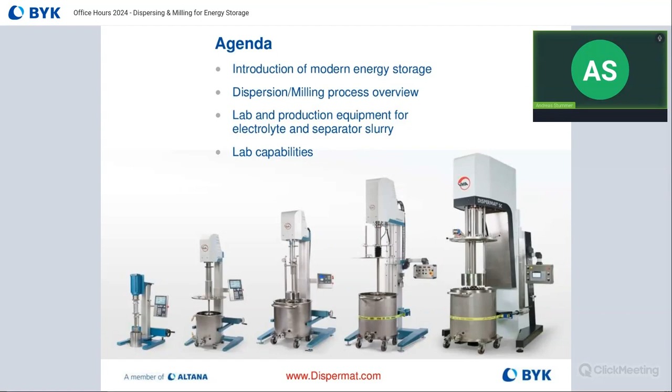So basically, everybody knows there's a lot of research being done with lithium-ion batteries, and this technology is always improving. The goal is to increase the range, have more power, shorter charging times, make them safer, and so on. A lot of companies today are looking at that type of equipment, not only from an R&D perspective, but also from a manufacturing and scale-up perspective. So picking the right dispersion milling technology, as well as the additive package, is really critical when we formulate these next generation slurries and battery designs for these energy storage systems or fuel cell applications.

So solid state lithium batteries are something that is being worked on aggressively as we speak. There are a lot of companies developing barrier coatings and so on that use our technology to improve the performance and help develop the next generation batteries. So here at BYK-Gardner, with VMA, who are the manufacturer of the equipment, we offer really a good portfolio of products that help you develop these types of batteries or fuel cells. The equipment is designed to give you best performance and offer modularity.

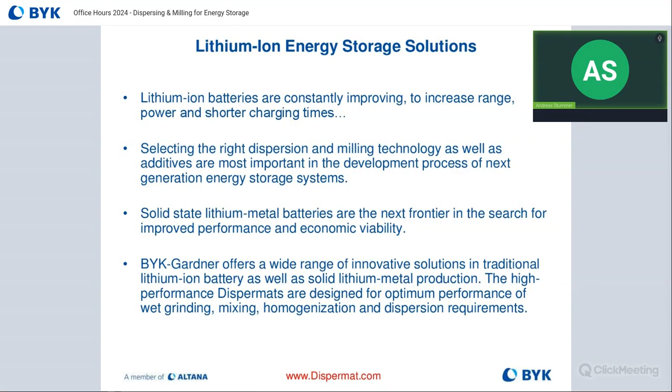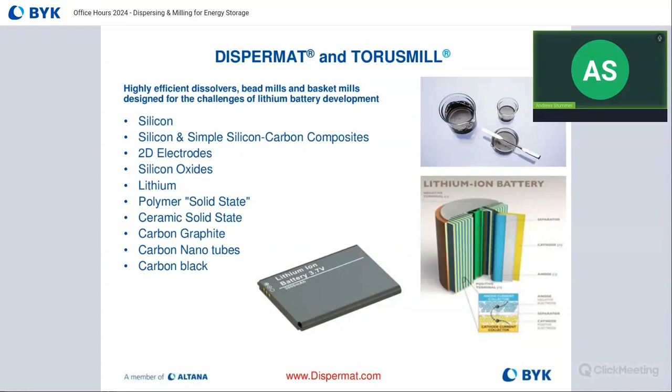So the equipment is used for many different applications. We have silicon dispersion requirements, electrodes, silicon oxides, lithium, polymers, solid state ceramic, solid state carbon graphite, carbon nanotubes, carbon black. So these are just some of those formulations that require really good dispersing technology.

So when you look at how these batteries are designed, there's basically an electrolyte in the battery that allows the ions to flow in between the anode and the cathode. They can be either liquid or solid. Soluble salts, acids, and bases can generally also act as these electrolytes. So dispersing and grinding equipment is used to improve and develop these separators by helping to reduce the particle size down to primary particle size. And that will help with the transfer efficiency of these ion particles moving in between the anode and the cathode.

Anode and cathode slurries are developed using a lot of our technology today, and that will help you get a better battery performance. Rheology and viscosity measurements are often critical during the R&D or even manufacturing process to understand what's happening with the slurry while we disperse or mill. We also have technology that can give you really good live data to help you understand how your slurry is changing during the dispersing and milling process.

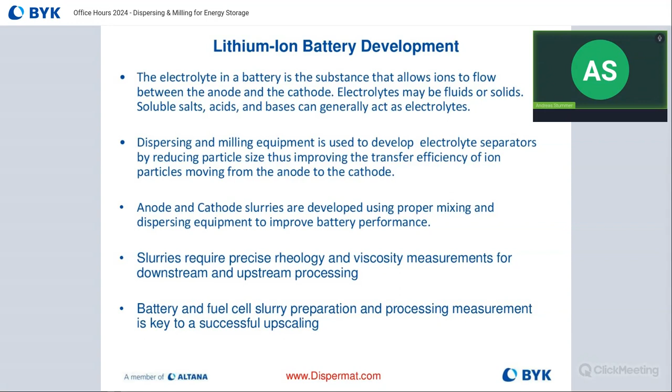Battery and fuel cell slurry preparation and processing measurement is also key to having a successful upscale result when we go from laboratory scale all the way up to pilot and then to manufacturing. We have a lot of that capability built into our control panel.

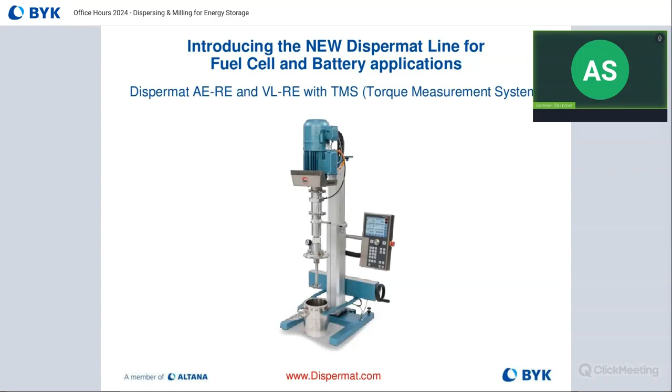Here you can see this is a brand new Dispermat developed for fuel cell and battery applications that already has a torque measurement sensor built in to give you really good live data on viscosity that you might need when you develop your slurries. We'll talk more in detail about the different Dispermats later in the presentation.

Here's a quick slide about that torque measurement sensor. That's an optional module you can acquire. It's not a calculated value when we measure the torque - we actually measure it. We don't use the frequency inverter to calculate it. We really have a sensor that plugs into our shaft, with a very tight accuracy of 0.1 Newton meters.

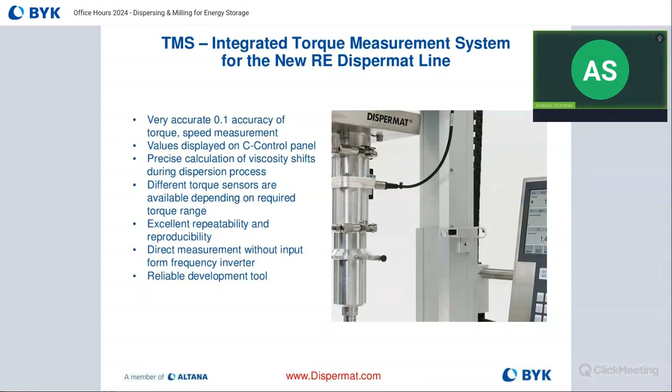All the data will be displayed on the actual control panel so you can see how your viscosity is shifting during the dispersion and milling process. Torque value is an indirect measurement of viscosity and can be very helpful in understanding how well you're processing your material. That's just one of the new developments we offer with the TMS sensor.

With that technology, the control board allows you to really precisely monitor and control all the different variables such as speed, energy input, torque value. You can actually see the tip speed. We have a timer function and a temperature measurement built in that gives you accurate data.

There's also the ability to see the entire dispersion process in a graphical interface. Each of these variables - speed, time, temperature, torque, energy input - will be displayed in a graph, with each of these indices as a trend line.

As you're dispersing and milling, let's say your viscosity is increasing - that means you will put in more energy. If you're running with constant speed, then you should see a spike or increase in the trend line of your torque curve, for example. That's really helpful to give you really good live data.

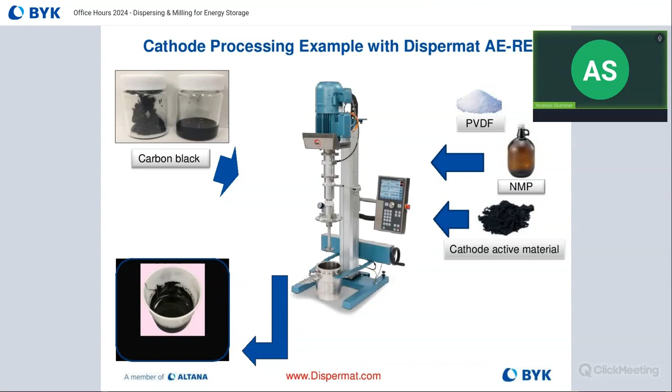Here's a good example of how we were able to do a good job with that AE unit to reduce the particle size of a cathode slurry. We used the Dispermat CN20, which is a standard middle-of-the-road Dispermat with a Cowles blade, for about 1 hour. We were de-agglomerating these larger particles, and the starting point was about 100 microns.

Then we were using the TML mill, which is a basket mill attachment that pops onto the disperser head, and basically converts the CN20 disperser into a CN20 media mill, which is very unique to our approach to dispersing and milling. You only need one piece of equipment that can do both dispersing as well as milling.

The final result after 3 hours is really good - we were able to reduce the particle size all the way down to 2 microns on average. We're able to go much lower; we have a nano kit, but this is what the customer wanted to see, and that was their reference point. They stopped the exercise at 2 microns and were very happy with these results.

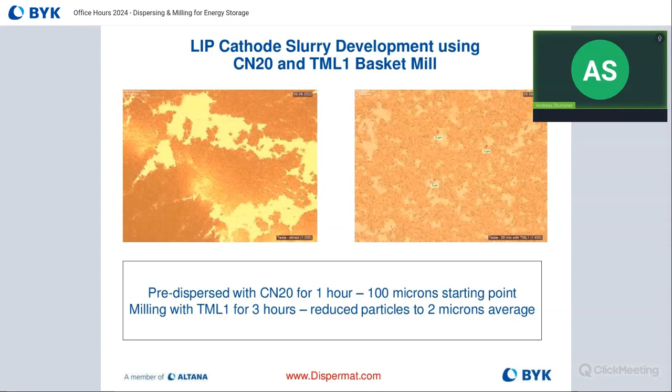So leading into now the dispersion process, what are we actually doing when we use this type of equipment? As you look under the microscope, a lot of times you have these clusters of particles. They are clumped together by invisible forces called van der Waals forces, basically electromagnetic forces that bind these particles together. Our goal is really only to break up these binding forces.

These larger clusters are called agglomerates. By using a Cowles blade, a disperser with the blade with teeth, we're able to turn them down into the aggregate size - smaller clusters with less particles, but still clumped together. If you want to go from the aggregate level down to the primary particle level, then you need to do milling.

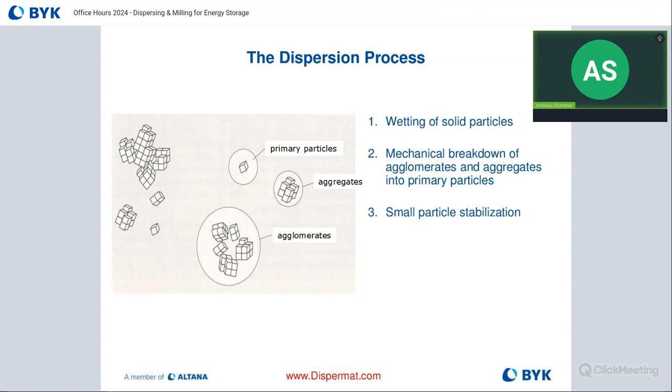And then, of course, we always need to remember that we need additives to help us stabilize our materials in the suspension so they don't flocculate back together.

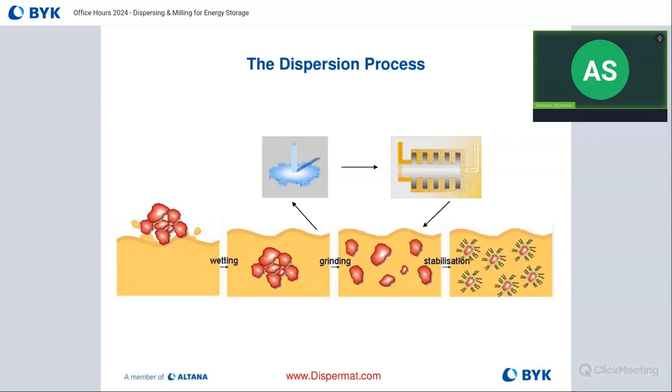And then again, really critical is the stabilization of our particles in the slurry, where we need to use some formula to help us do that.

I apologize, I'm not the additive expert, but I can put you in touch with my colleague, Erin Kelly from BYK Additives. She's really knowledgeable and is our end-use manager for the additive side to help guide you in the right direction.

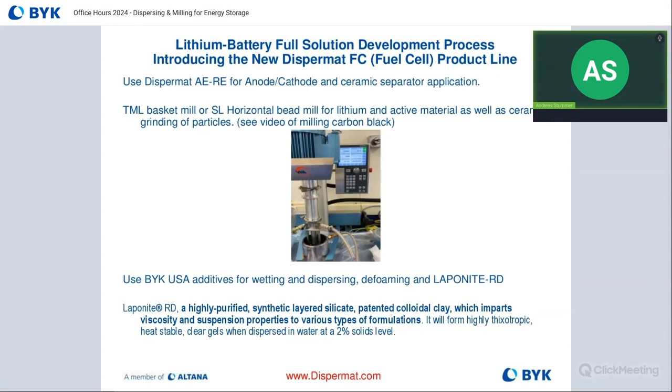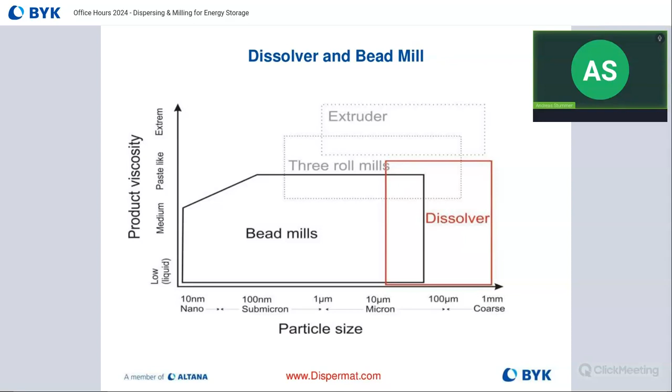So we can use different bead mills. We have a basket mill approach, what you've seen in the pictures earlier, works really well, or horizontal bead mills for super small particle size requirements. Anything less than 500 nanometers, we need to use a horizontal media mill, and with that we can really go down to sub 100 nanometers. We have customers that are milling in the 50 nanometer range with that type of equipment.

So for pre-dispersion, it's really critical to remember when we use a Cowles blade, we want to stay within 18 to 25 meters per second of tip speed. That's kind of optimum, and that really yields good results. For that, we have a range of different dispermats we can talk about a few slides later. I'll show you some of these models.

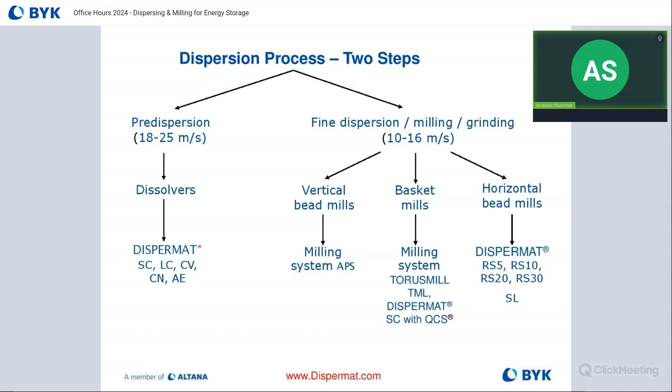And then we also need to remember, when we are milling, some people refer to it as fine dispersing or grinding, our tip speed is between 10 to 16 meters per second, so a lot slower than the pre-dispersion process. There again, we have vertical bead mills - our system is called the APS. We also have the basket mill TML, and then horizontal bead mill RS for manufacturing, or the SL for lab and pilot scale.

Depending on the viscosity, we need to increase or decrease our blade diameter. If my viscosity is really low, I want to use a smaller diameter blade. If my viscosity increases, gets really thick, more like a paste, I want to increase the diameter of my blade to help move the product. Imagine a very thick slurry, almost paste-like. If you use a small blade, it would be difficult to process the material because the blade would be sitting in the middle of the container, kind of spinning and not doing much, while the product settles out around the smaller blade. So it's really important to use the correct blade diameter for your viscosities.

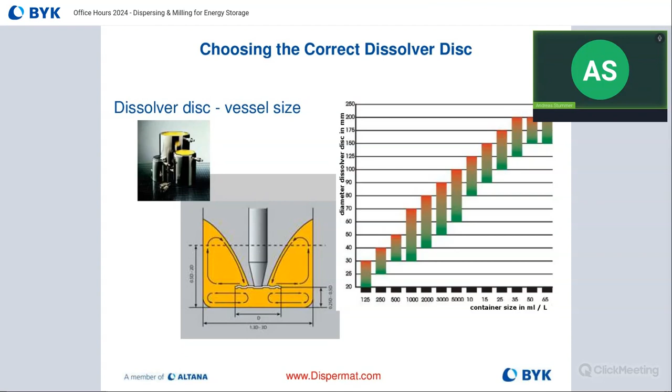There is a rule of thumb for selecting the right blade size. When we talk about viscosities, materials from 0 to 500 we consider low viscosity. Medium viscosities are from 500 to 5,000, and high viscosities are anything over 5,000 centipoise. This just helps you select the right diameter blade.

This is a really important slide. As I mentioned earlier, the tip speed is so important to dial in correctly. There is a formula: basically it's the RPMs multiplied by pi times the diameter of your dispersing blade. If you want to express that in meters per second, you divide everything by 60. But you also have to remember that the diameter of the dispersing blade needs to be expressed in meters.

So if you have a 50 millimeter blade, for example, you need to express it as 0.05, times 3.14, times the RPMs. Let's say you're running 5,000 RPMs, and then you divide everything by 60. That will give you the actual tip speed at 5,000 RPM with a 50 millimeter diameter blade. The goal is to be between 18 to 25 meters per second to optimize the pre-dispersion window, and when we're milling, 10 to 16 meters per second, but the calculation is the same.

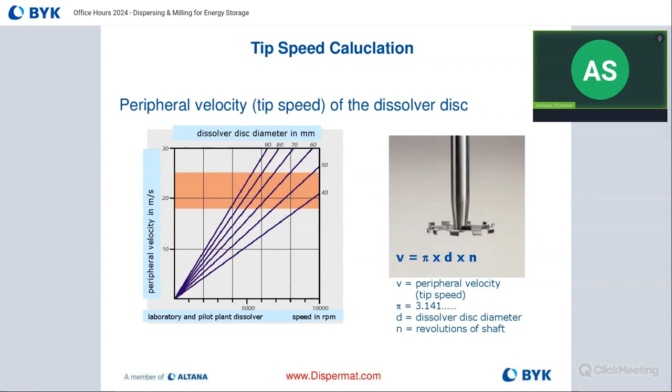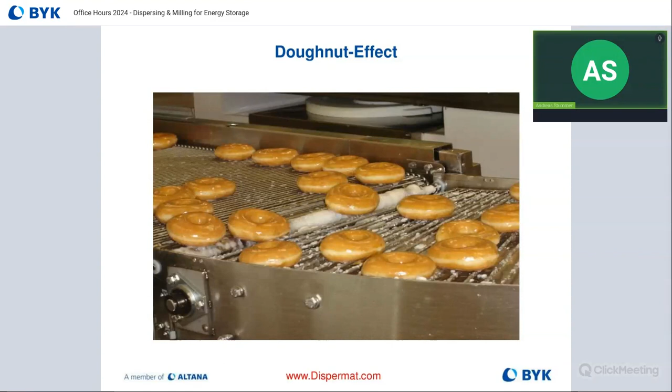That's really important, and we have something called the donut effect. It's called that way because it's really something you can see when you look inside a container and you're optimizing the dispersion parameters. Here we have the optimum tip speed, the right blade selection, a good viscosity, so we see a donut forming. That is basically the visual cue that, yes, I'm deagglomerating. This looks good—you should see good results after about 10 to 15 minutes. So that's what you want to see.

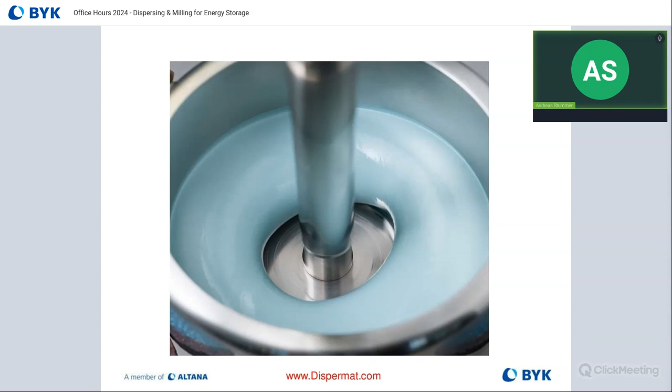Of course, there will be instances when you have really low viscosity materials where it's very hard to see a donut because the donut would collapse before it can even be formed. That doesn't mean you're not dispersing properly, it just means you have very low viscosity. So you can play around with maybe a different blade diameter. But usually the donut is visible between 2 to 5,000 centipoise—you'll have no problem seeing a really good looking donut.

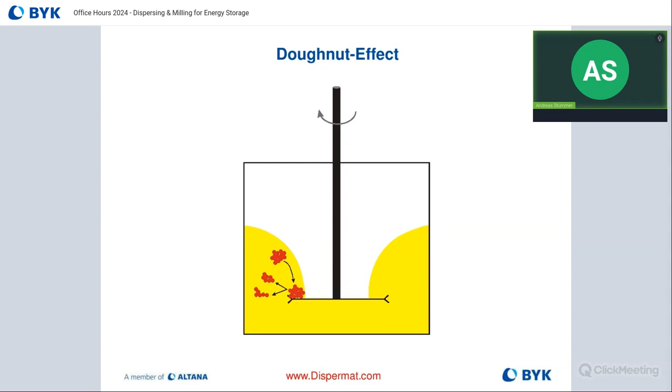Here is how the donut effect is established. You can see the blade has these teeth, and these teeth and the edges of our blade are actually causing the shearing, and this is where we are deagglomerating. That's basically where the donut should build up, right there on the edges—as you had seen on the slide earlier, that's how we actually form a donut.

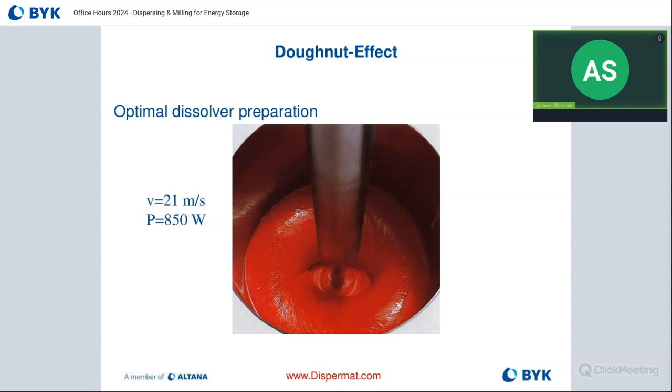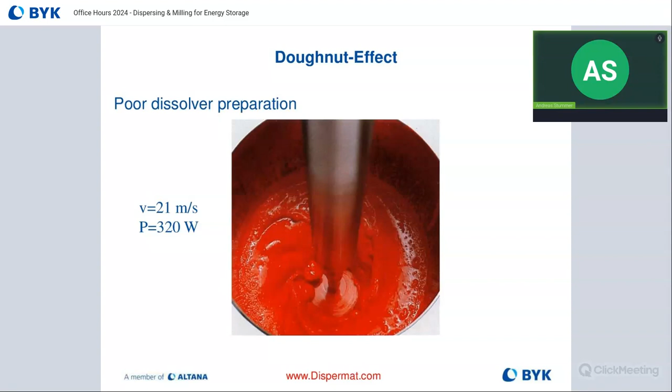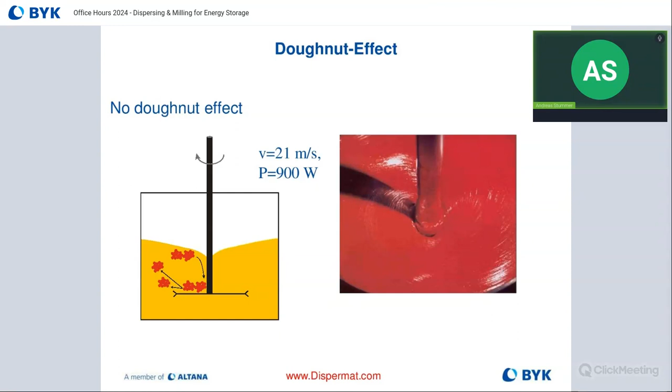In this case, we're running with 900 watts of energy input, also at 21 meters per second. It's not a problem, we are putting in a lot of good energy. We don't see a donut because the material is really thick, so it has a very hard time to actually form a donut. That doesn't mean we are not pre-dispersing, it just means our viscosity is probably quite a bit higher than 5,000 centipoise. Therefore you're not really seeing the donut, but you are still deagglomerating. I would not be worried about it.

It's very important to remember that timing is everything. The duration of our dispersion, when we pre-disperse, can be as low as 15 minutes or as long as an hour, depending on the material. The donut effect is a good visual cue to help us understand how well we are performing.

Tip speed, again, 18 to 25 meters per second is optimum. The geometric consideration, meaning the blade diameter, there's different blade types as well. Some blades also have additional teeth, or can be different types of materials. That will also depend on the viscosity - larger blades for high viscosities, smaller blades for very low viscosities.

The volume of our mill base in the container - we are looking at about 50% fill rate, as high as 70% and as low as 40%. But 50 is kind of the sweet spot. We don't want to go too much higher because if you put in a shear, you're going to spill the material. Also, when milling with a basket mill, if you have a 70% fill rate, it's likely if you turn up the mill that, because the basket mill weighs a lot, it kind of pushes the product up, and then you could also have spilling if you go above 70% fill rate. So we like to stay in the 50% range.

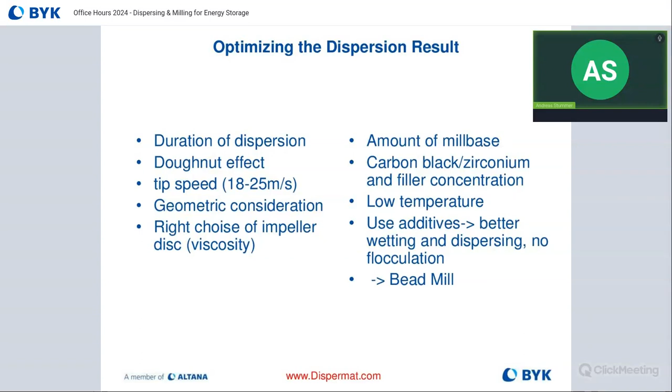And then again, additives, very important. Don't forget the good additive package to really help us not only process the material, but also stabilize it post-processing. And then once we are done with the pre-dispersion, we move over to the bead milling process.

Bead milling is a whole different animal. It allows us to really start to take the aggregates and bring them down to the primary particle size. A dissolver is great, we need it, it's an absolute must to start the process to de-agglomerate, but we can only put in a limited amount of energy, and it's really only used to de-agglomerate. We cannot get from the aggregate level down to the primary particle size with just the dissolver blade.

But it is critical that you always start with the dissolver for wetting and for breaking up these large particles, because if you don't, you run the risk of clogging a mill - the particles are so large that if you use a screen in your media mill, or a dynamic gap, they would clog very quickly. So it's really important that you always start out with the dissolver.

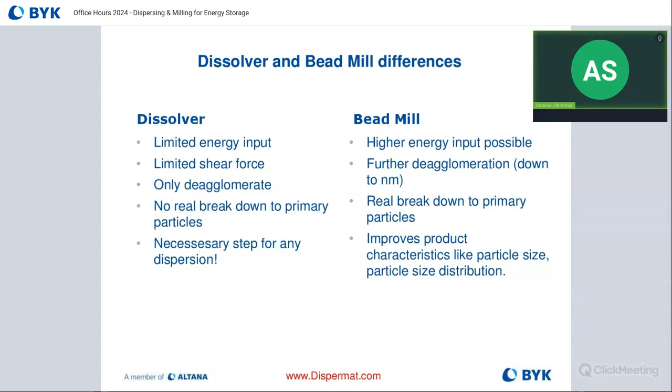Once we achieve good results and we are between 10 to 30 microns of particle size, that's when we start the bead milling process, where we can put in a lot more energy. This really helps us get down to the primary particle size, and even nanometer range for a lot of these applications. It gives us a much better looking product, much better performance, reduced particle size, and a much better particle size distribution.

So what actually happens inside of a bead mill? Basically we have an enclosed chamber - it's open on top, not totally enclosed, but where the beads are. Then basically we have the slurry go in, either in a horizontal setup or a basket mill setup, and inside of that mill we have beads with our milling disc or rotor.

As these beads collide at very high velocities, they're actually pushing away these particles, these clusters. That shearing motion, that action, is actually what's causing the binding forces to break up and reduce the particle size. That's really what is happening inside of a mill, and that's how we actually get down to the primary particle size.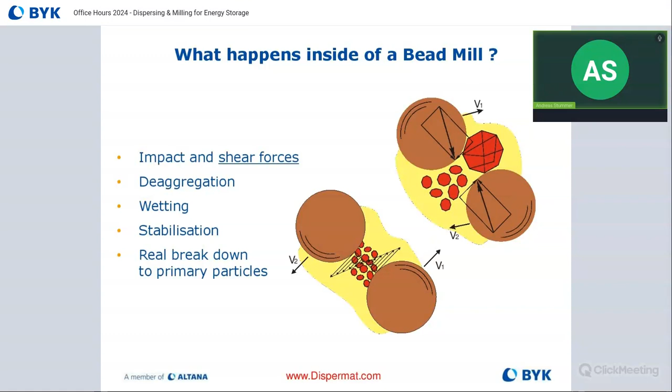So kinetic energy is very important to remember. There's a lot of people that talk about different types of beads. We have customers, most of them use zirconium oxide. They are very good beads. They're heavy, and they will have much higher kinetic energy than, for example, something like glass or light beads. So kinetic energy is very important, and beads play a really important factor in that.

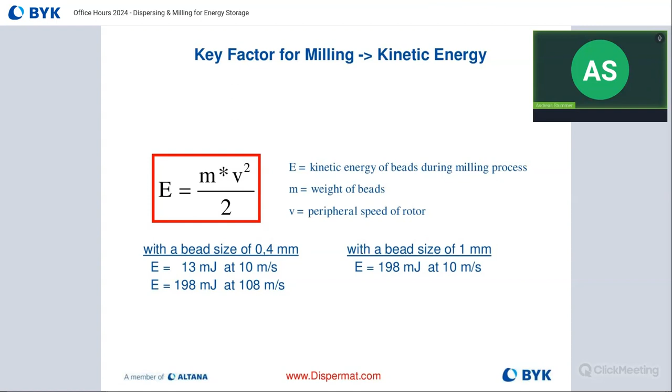As you can see, M is the weight of the bead. So if you want to write down the formula, that helps you understand how much energy you're putting in during the milling process. This kind of slide shows it well.

The difference, for example, you have a zirconium oxide cerium stabilized bead. The specific gravity is 6.1 versus a glass unleaded bead which is 2.5. So it's almost 2.5 times heavier on the weight per bead. Also much harder, it's almost 3 times as hard to use a zirconium oxide bead than a glass bead. So yes, they're more expensive, but they are really the right media to use when you're milling these types of slurries. There are all different sizes available depending on the final particle size that you're looking for.

We usually start out with our mills at about 1 to 1.2 millimeter beads, that's kind of where we start with a 0.5 millimeter mesh. There's also a dynamic gap in the horizontal mills, standard 0.3 millimeter, that allows us to use the 1 to 1.2 millimeter beads.

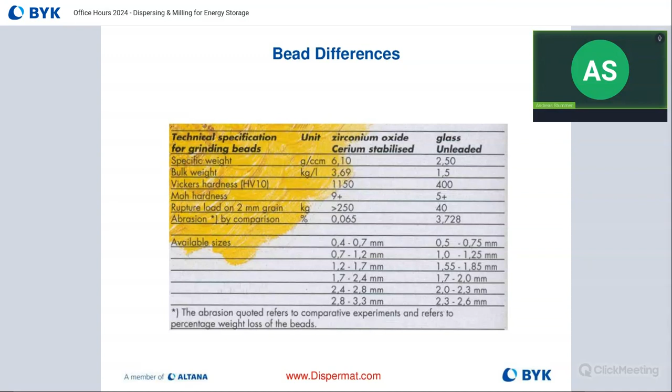Okay, so this is a good slide, I like it because it shows you again. You have these larger beads, and right where these beads merge or collide together, that would be your particle cluster, and that would be pushed out. That's the shearing that happens in these corners as the beads collide, where the breakup of the van der Waals forces actually takes place, continuing to reduce the particle size during the milling process.

So it's not so much that we're always crushing the particles. Think about it this way: when you were a little kid and you sat in the bathtub and your mom gave you a rubber duck, and you tried to grab the rubber duck in the water by pushing your hands together, what happened? The rubber duck, you probably didn't get it, right, in the water. The rubber duck was always pushed away by the force from the water. That's kind of like what's happening inside of a bead mill. So the beads would be acting like your hands, and the particles would be the rubber duck. As the beads come together at high velocities, that rubber duck, or that particle cluster, would be pushed away.

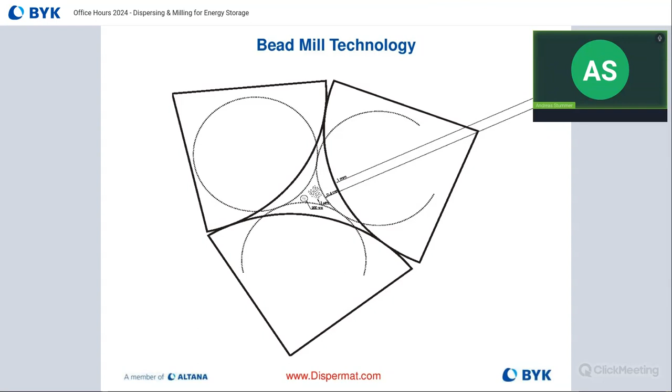Of course, you can also crush some of these particles, but the idea is to break up the binding forces, and you're really achieving that through those shearing motions, and that's what happens inside of a bead mill.

So here are some of the critical parameters that are going to influence our process. Particle size after pre-dispersion with the dissolver, we talked about that earlier, 10 to 30 microns is kind of the sweet spot. Bead size depends on how small you want to go, what the final particle size is, but we like to start out with about 1 to 1.2 millimeter.

Specific weight of the beads is really important to bump up the kinetic energy. The bead loading is kind of fixed depending on the type of mill you're using. Shape of the beads is very important, you always want really good quality beads. If you look at them under the microscope, they should be perfectly spherical, not oval shaped or with edges or shards. We have seen all sorts of poor quality media at low cost from low cost suppliers that do not hold up to good standards. So make sure you spend a little bit more money on better quality beads, that will be very helpful in the process. Please stay away from glass or anything like that, as glass will break easily, and then you end up with shards in your mill base, and that is not good.

Speed of the milling tool when we're milling, again, 10 to 16 meters per second. I know I'm repeating myself, but it's really, really important to maintain a good tip speed. Product temperature, again, control is key. We have cooling jackets on our supply vessels as well as on the milling chambers. How often does it go through the milling chamber or basket mill, and the total amount of milling time, how long does my product sit inside of the milling chamber.

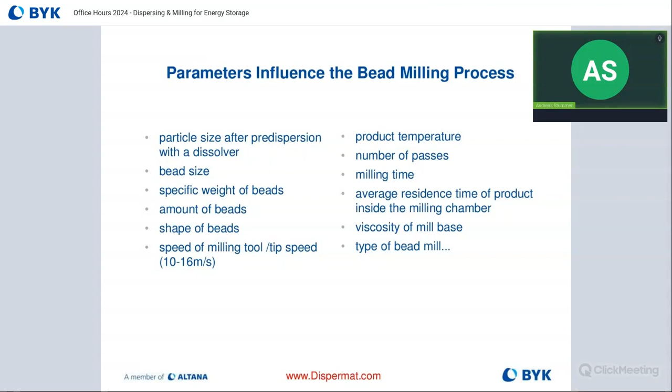My test is always: I have a container with your product, I turn it upside down. What happens to the product? Does it come out, is it flowing out? If it's flowing, even as thick as honey, as long as it flows, I can process it. If it's stuck in the container, it's very difficult to process. That will severely limit the type of milling system you can use for that formula.

Now let's talk more in depth about the different types of dispersion units we offer. One of the key things I mentioned earlier is our modularity approach. You have a standard dispermat, the piece in the middle, a dissolver, and then you can accessorize it depending on how you want to work with the equipment. It gets delivered with a blade, but then you can buy a rotor stator, a vertical bead mill, a wall scraping unit, a vacuum system called CDS, and the TML basket mill, all components or attachments you can buy later to put onto our dispermat.

The way this works: as you can see in this picture, right below the motor on top, there's a clamping ring. There's what's called a DL shaft, and it functions almost like a bayonet style system. You remove the clamping ring, turn this assembly 180 degrees, and it pops out, so you can just pull it down. Then you replace it with any of these attachments, put it in, lock it back in place, put on the clamping ring, and now you're running a basket mill, for example. That's really cool because you don't need to buy multiple pieces of equipment, everything can be processed on one machine, you just buy the different attachments.

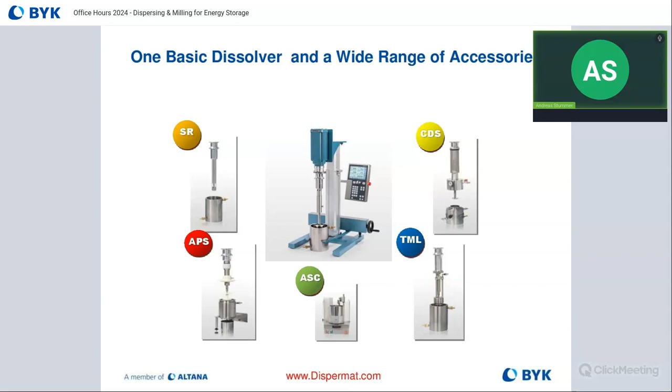The vacuum system is nice because it allows you to not only pull a vacuum, but also purge with nitrogen, argon, or any other inert gas if that's critical for your process. I can also acquire a basket mill with vacuum capability, so not only can I disperse under vacuum, I can also mill under vacuum, or mill with nitrogen, argon, or any other inert gas. That's really cool, and unique to the VMA dispermat line.

Here's a better picture, I should have shown it earlier. You can see the clamping ring right below the motor. That's what you remove, then you turn this assembly 180 degrees, pull it out, and replace it with whatever attachment you want to use. This one comes with the torque measurement system, has the ability to add vacuum, and we also have the ability to have variable speed.

We can also run the machine not only at a certain speed, but also with constant power. That means instead of running, say, 3,000 RPM, I want to run this trial or manufacturing process at 3,000 watts of energy. As my viscosity changes during the dispersion or milling process, my speed adjusts. If my viscosity increases, my speed decreases to maintain the 3,000 watts of energy. If my viscosity decreases, my speed increases to maintain the 3,000 watts. That is called constant power.

So I can either go with constant power or constant speed, depending on how I want to run it. Or if I want to go from small lab scale to manufacturing, I might want to use constant power because it gives me really good quality upscale data. Not only is it easy to process the material, but it will also help calculate how much energy you would be using to process a certain amount of material in a certain amount of time when using constant power, because I know exactly how much energy I'm using. Again, the modularity approach with the various accessories.

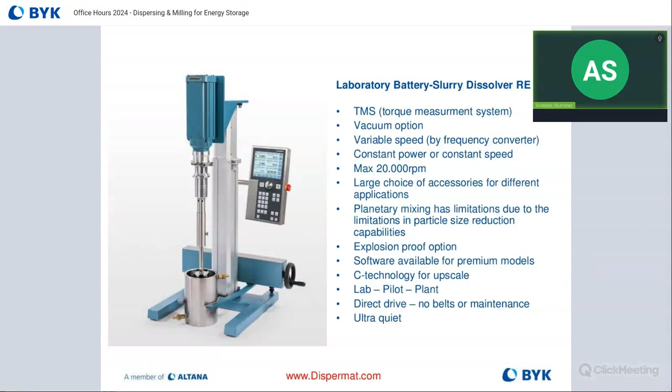Our motors, if you ever worked on a Dispermat, you would recognize it immediately because they're so quiet. They are basically beltless, direct drive motors, so there's no maintenance on the motor at all. The shaft plugs in right to the motor below. There's a flange that goes directly into the motor, so there's no belts or anything like that, no oils needed, no grease. So these machines will last a lifetime. We have customers that are using Dispermats that are 40 years old that are still running on the original motors today without ever having to do any maintenance on them. They're workhorses, so they're extremely reliable and high quality build.

Then we have a very cool unit. It's for dispersing slurries under a vacuum. This is the vacuum dissolver, purpose built, so this is not a modular attachment, it's really built that way. And it also comes with the wall scraper.

A lot of customers really like that option to remove the slurry from off the container wall and push it back into the middle. That's what that little arm does. You can see that in the back there behind the blade, that would be the dispersing or the scraper blade.

So the cover is open on top. I mean, it's closed, but you have the ability to open it with a viewing glass. There is a light, so you can see what's going on inside of the container while you're pulling a vacuum. But again, vacuum is not a necessity. You can also just purge it with nitrogen or argon gas or any inert gas that you would like, and then you can process your material that way.

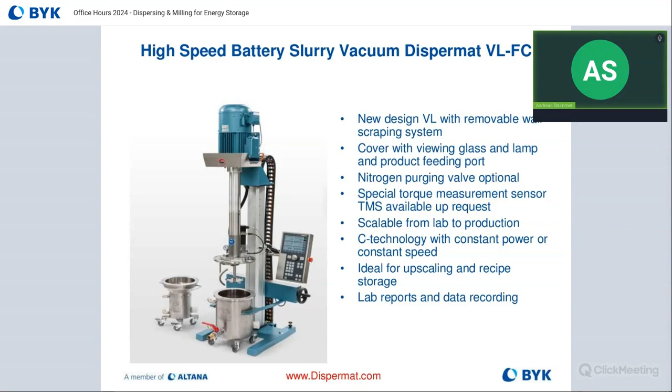Cooling jacket, so this is double walled and has all the pressure gauges on top. And then we have the ability to supply with one base model, different size containers, so you don't have to swap out the cover. As you can see, there's a container behind on wheels that's smaller than the one that's locked in place. That container, though, has a collar on it, and that collar perfectly fits the cover of the VL. So that means it's fully exchangeable to different container sizes depending on how much slurry you want to process. Very cool, very good to go from small scale to manufacturing, because we also offer vacuum dissolvers for manufacturing also.

So this is the latest dissolver, very small lab scale. It's called the Dispermat CV3 Evo, and it's going to be released here in May. We had it down in Florida at the battery show, and we're going to have it up in Detroit, Michigan. I think it moved from Novi to Detroit, the large battery show. So we'll have one of those up there as well.

This can go up to 20,000 RPM. We have the ability to do full attachments on here: dissolver blade, TML basket mill, APS vertical bead mill, vacuum system, or even a rotor stator would all fit onto this machine. Beautiful design. And there's going to be two models, a basic model and the premium model.

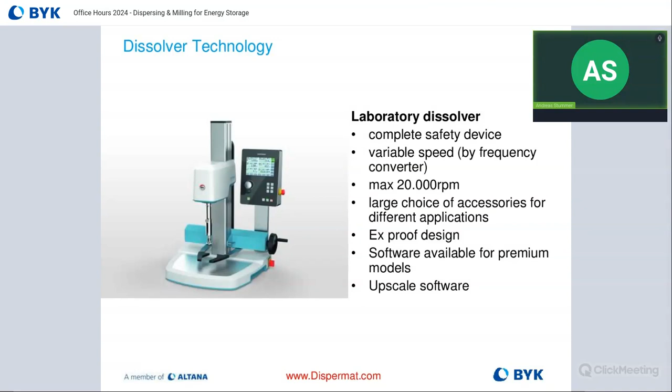The premium model also has the ability to plug in a scale on the control panel right next to it, so you can weigh out your raw materials right next to the dissolver, and it'll show the data on the screen right here. Then you can store all the data for different batches, so you can give a batch a name or a product ID, and that way next time if you want to download all the data, you have all the data right there, as well as all the raw materials that you weighed out on your lab report. So very cool.

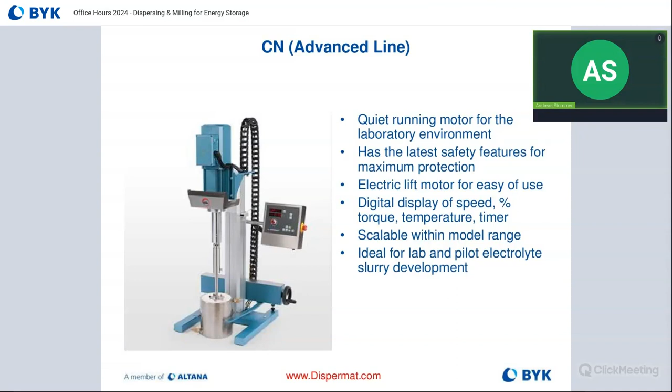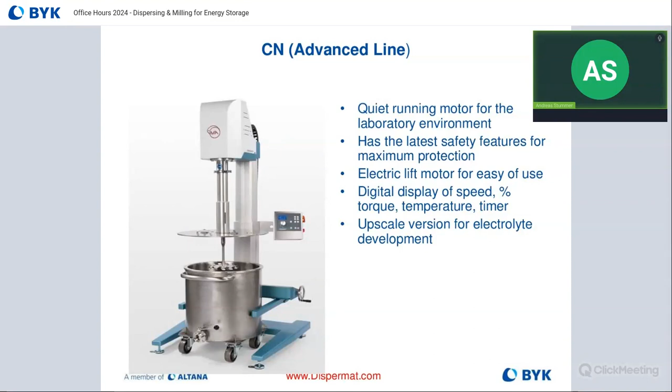Then we have the CN. This was the model I showed you earlier, where we processed the cathode. It's a basic machine that has the ability to put on all these different attachments. And then we can go pilot scale in the same model range, the CN range, again very simple, high quality build, giving you excellent performance for larger volumes.

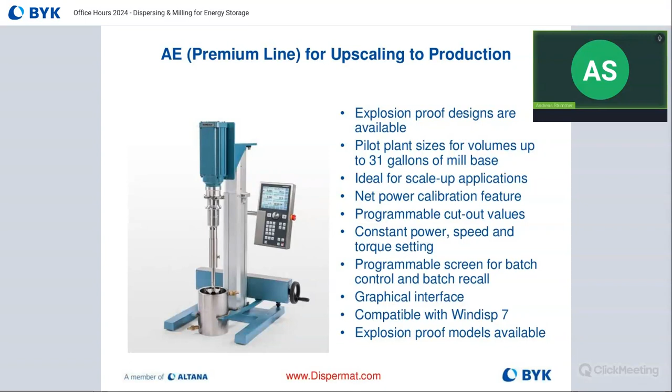Then we have the AE, which is our premium line, also with the AE RE for batteries. This is fully expandable again, but it has that C control panel. And again, this is also scalable, where we can go up to an AE pilot unit for larger volumes. Again, this can all be configured for vacuum, argon, or nitrogen.

And then basically you're also able to mill with this machine, not only disperse, but you can add a basket mill on here, as you can add on the smaller models.

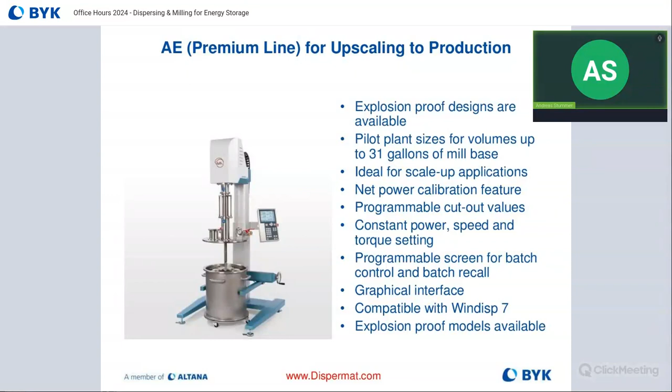Then we have a range of horizontal media mills that are used to go into the super, super small nano range, so anything less than 500 nanometers, as low as 50 nanometers. We can do that with the SL machine.

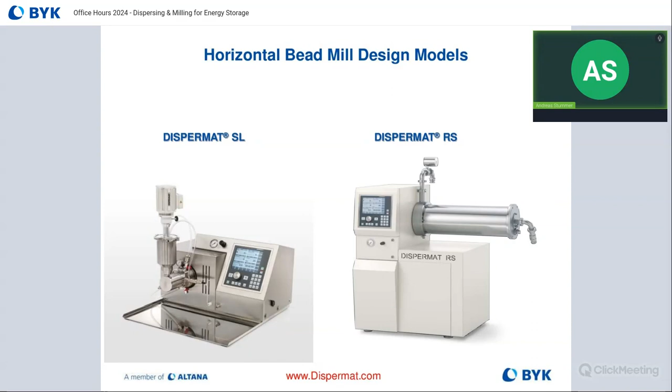So on the left, you have the lab model, and then the production scale. One example of a production scale would be the RS on the right. In our lab in Connecticut, in Wallingford, we actually have an SL up there with the nano kit. So if you ever want to come up there and take a look or run your slurries, you're more than welcome to join us.

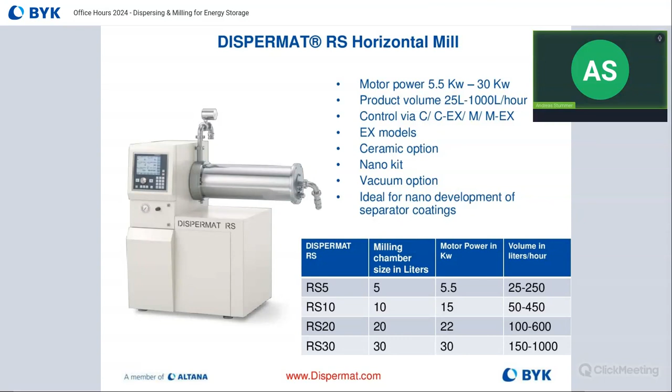Here's a little more information on the production side horizontal mill. Again, we have ceramic capability, we can add a nano kit, we have a vacuum option. So many different configurations can be picked to meet your requirements for your application.

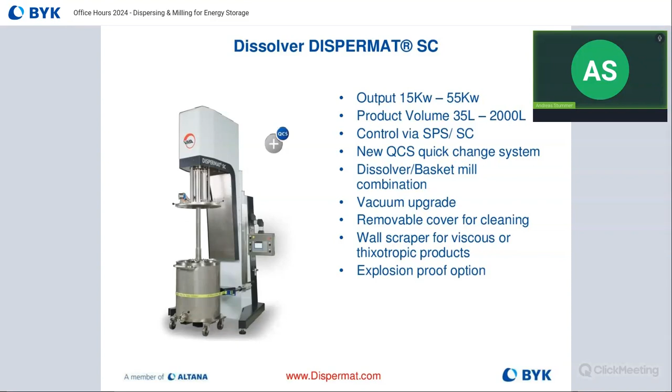And then we move into a little bit of a production scale overview. So here is the Dispermat SC. We can go up to about 2,000 liters of product volume. Again, we have the quick change system, that bayonet style, where we can move from a dissolver to a basket mill on one machine. We also can add a wall scraper, and we can do the vacuum or nitrogen upgrade, all available with our production scale equipment.

This slide shows you the SC, and then with the quick change, you just quickly go from a dissolver over to a basket mill. Again, the advantage there is I have one machine that can do both dispersing and milling, so I don't need to buy two machines.

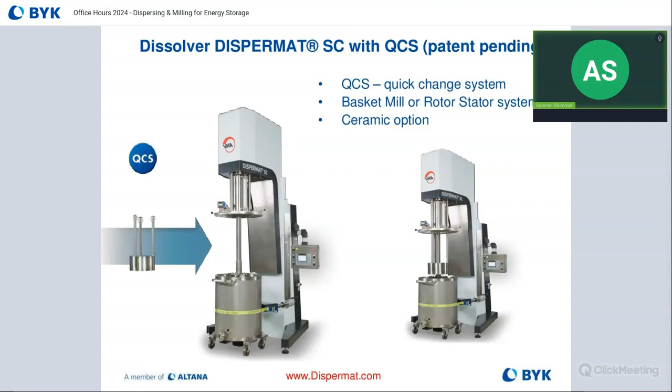So it's very nice to process the material in an ergonomic, space-saving kind of way. You don't need to have multiple pieces of equipment. We use a trolley to actually replace the dissolver shaft with the basket mill back and forth, so that changeover can take about 5 minutes and is really quick and effective.

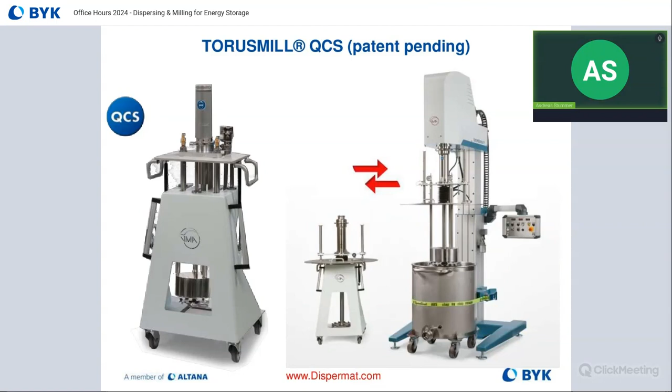This is what it looks like with the vacuum option. So you can see this is a vacuum cover with all the different ports on it. And again, that vacuum is only an option. It's a sealed container, so again, we can do the nitrogen or the argon or whatever inert gas you want to use. But it's really effective.

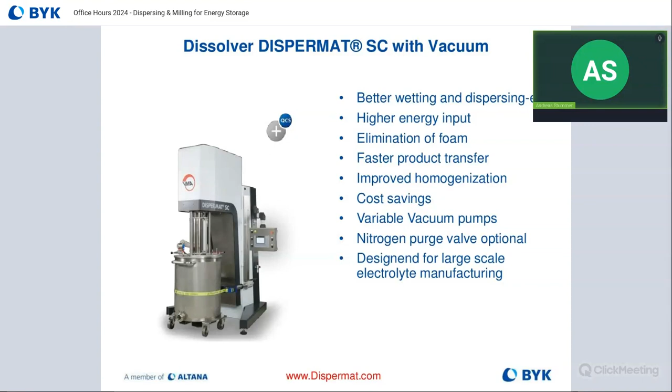We have different control panels, C technology or M technology, depending on how much data output you want to get from your production unit. Vacuum is also helpful in a lot of cases, it takes out foam. During the dispersing process, sometimes if you don't use a defoamer, foaming can be an issue, especially transferring product from one container to another. So that way we eliminate foam and just apply the vacuum.

And then we have a really cool system, the Dispermat TM. This machine is cool because it already combines the basket mill and the dissolver all in one, so you don't have to change anything. You first pre-disperse your material with the cowles blade, and when you're ready to do milling, you push a button on the control panel and the basket with the cover comes down, and now you're milling.

So you don't have to move containers around, you don't need to use a second machine. Everything can be done on one machine in one real process. Very well streamlined design, optimum for companies that don't want to move product containers around from one system to another. Everything can be dispersed and processed on one machine.

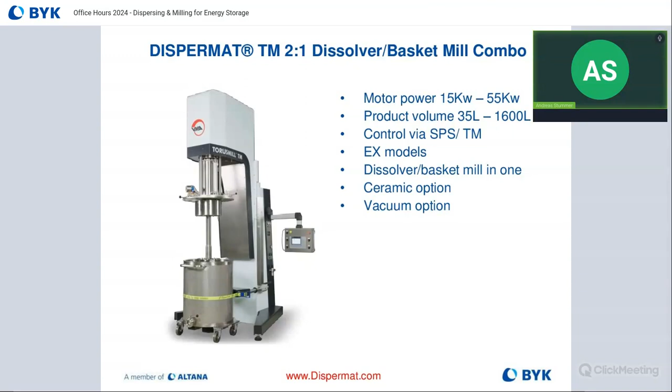So that's what it kind of looks like. Pre-dispersion, fine grinding, giving you really excellent results. But this is only good for up to about 500 nanometers. Anything smaller, we really need to use a horizontal mill like the SL or RS I showed you earlier.

Easy to clean, very safe. And again, space savings are huge. And it's a 2-in-1 machine. Very cool.

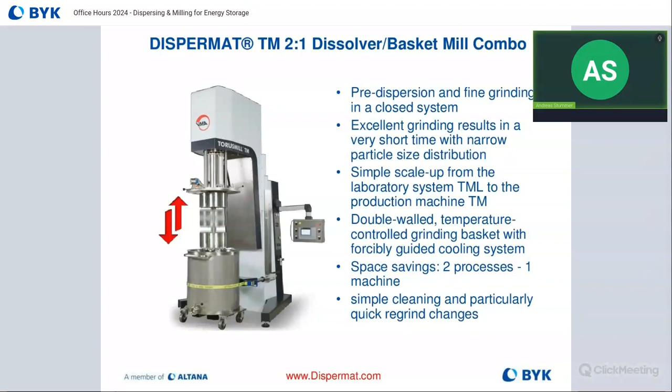So you don't have to take off the blade when you're milling, so everything stays on there. You just push a button on the panel, and then you are milling after you're done dispersing. Really cool system and extremely quiet. We also offer explosion-proof models as well.

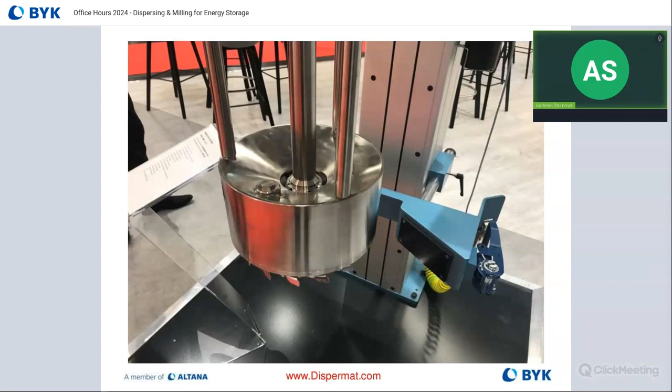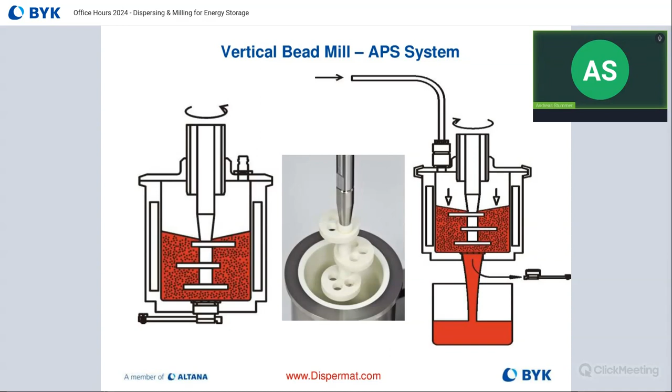That is really effective in smaller volumes, but not really good for large-scale manufacturing size batches because you have 100% bead loading. If I have, let's say, a 1 liter container, I can use 500 milliliters of slurry and 500 milliliters of beads. So I have a very high bead volume with the APS, giving you excellent milling results, but not good for manufacturing because imagine if you have 2,000 liters, you cannot have 2 tons of beads. First of all, it's cost prohibitive, and how do you handle and clean the beads? Very difficult. So this is excellent for lab scale.

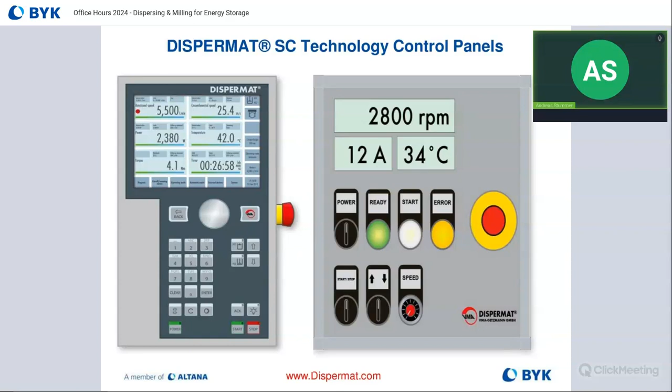Just 2 different control mechanisms for our manufacturing capability. We have the SC technology on the left, very simple control panel on the right, very manual, no data tracking, but very functional.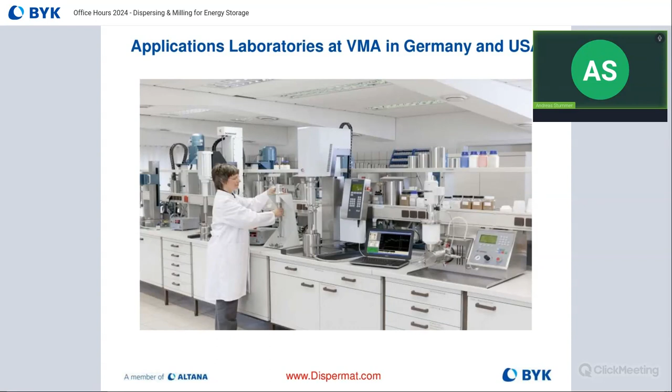Then we have a lab in Germany. That's a picture right here at VMA-Getzmann, the manufacturer of these beautiful systems. If you have a sister company or you want to go over there to check out the equipment, let us know, we can set that up. You're more than welcome to even run your material free of charge and evaluate the equipment.

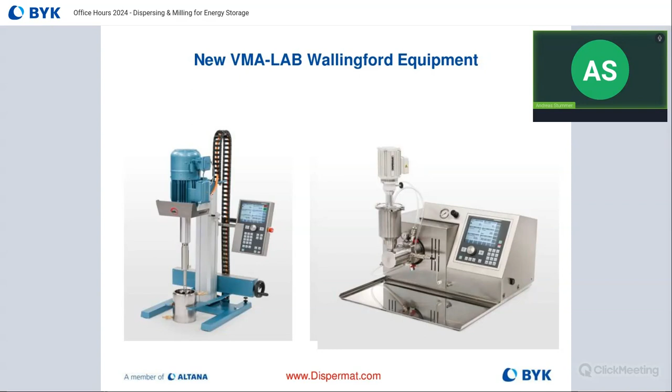In the US, we have a beautiful lab in Connecticut, in Wallingford, with a lot of high-end equipment. We have that horizontal SL mill, and we also have a Dispermat AE. Unfortunately, I don't have the torque measurement sensor, but it can still measure torque with the frequency inverter, but you get the idea. We have a lot of capabilities up there, also milling capabilities, basket mills, and so on.

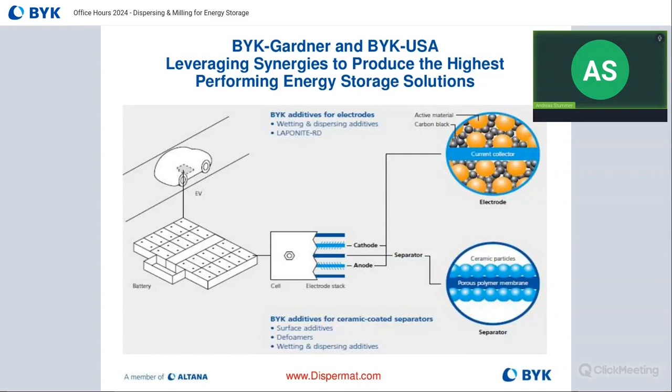And then finally, one slide from the additives group about the different additives that they offer for your electrodes and your separator coating, so they can help you with defoamers, wetting, and dispersing additives to give you really good results. My colleague there is Erin Kelly, and she would be more than welcome to help you out. So the Wallingford site is a first-class laboratory facility for dispersing applications, and it's also a battery additive development center.

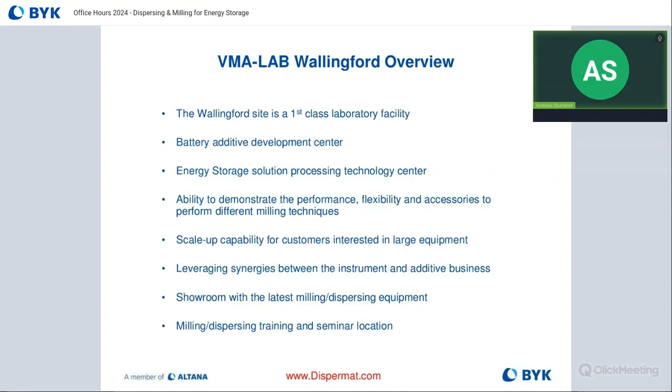Energy storage solution processing technology center - so we have everything under one roof. The idea is to have customers come in to evaluate the equipment and run trials, helping you understand how well the equipment works for your application, and also help with scale up. We can leverage synergies between the instrument and additive business, giving customers support not only on technology type but also better formula. If you don't want to run product and just come look at the equipment, you're welcome to do that too, and we can also do training and use it as a seminar location for customers.

With that, I think this concludes our presentation. We did it in 55 minutes, and I'll open it up to 5 minutes of questions.